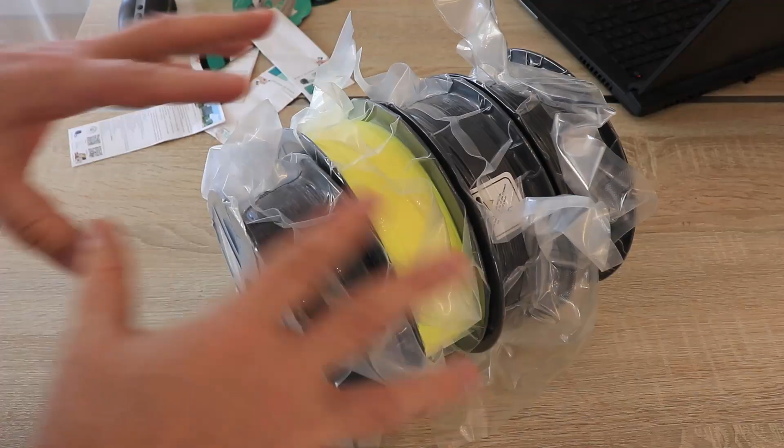The spools are in nice vacuum packaging, and here I have only one sticker with information about what is inside, and only on the other side. But for example, there is no brand on it. I don't understand, Sunlu, why they don't put their brand on the spool. So it has PLA META, an interesting printing temperature between 180 and 200 degrees Celsius, very low. PLA Plus in yellow color, printing temperature between 210 and 235 degrees Celsius. So this means I cannot use the same G-code for these filaments.

This is regular PLA, between 200 and 230 degrees Celsius recommended print temperature. And this is the carbon fiber version, 200 and 230 degrees Celsius recommended printing temperature. And unfortunately for the video, not too interesting, 3 of them are in black color and only 1 in yellow. This is vacuum packaging, but the bag is not resealable, so we cannot place it back and close it after printing. But anyway, PLA is not so sensitive to moisture compared to PETG or nylon filaments. And it's very nice that they have the warning for beginners to prevent tangling, to lock the end of the filament.

But Sunlu, for this I would recommend placing more holes on this spool. And the distance should be a little bit bigger, because I'm not sure if it is visible on camera too, but for example in this case this already broke in these 2 spots. I think with the carbon fiber version they should include here the warning about the hardened nozzle.

Usually carbon fiber versions feel like sandpaper to the touch, but this is a little bit smoother, not like those carbon fiber nylons I tested recently. But of course it is not as smooth as the other 3, but anyway definitely use a hardened nozzle with this carbon fiber filament. I'm starting with regular PLA, and the temperature tower will be from 230 to 200 degrees Celsius.

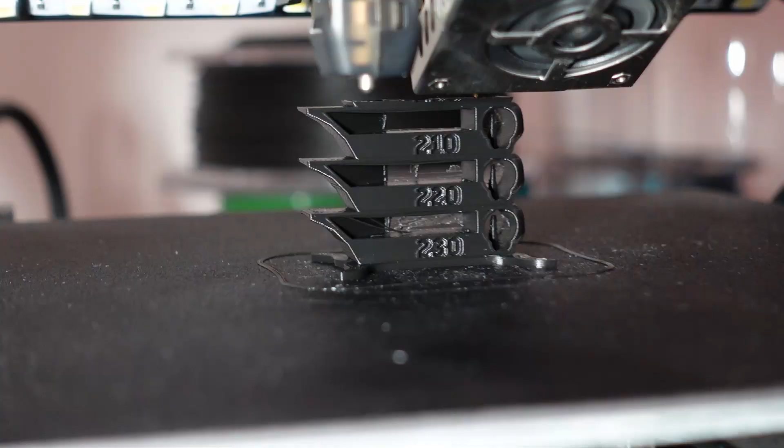The first layer looks good, but usually I don't even have problems with the Ender 3 S1 and PLA. Printing is okay, only I can see a little bit more stringing at 230 degrees Celsius, significantly reduced at 220, and completely disappeared at 210 degrees Celsius. But this means that the filament is not completely dry out of the box. The last element looks perfect.

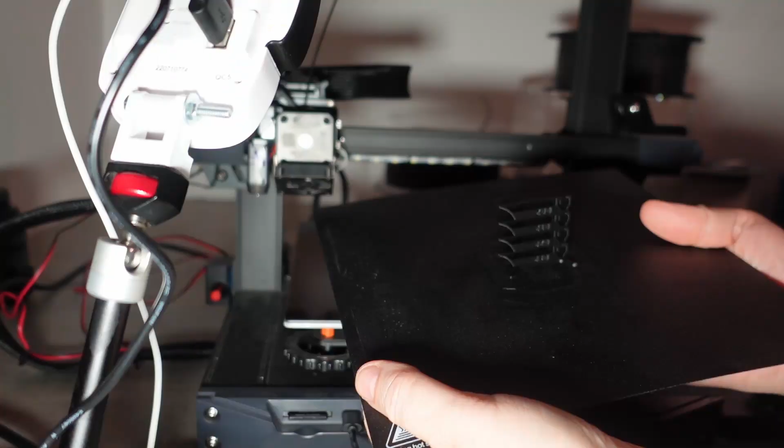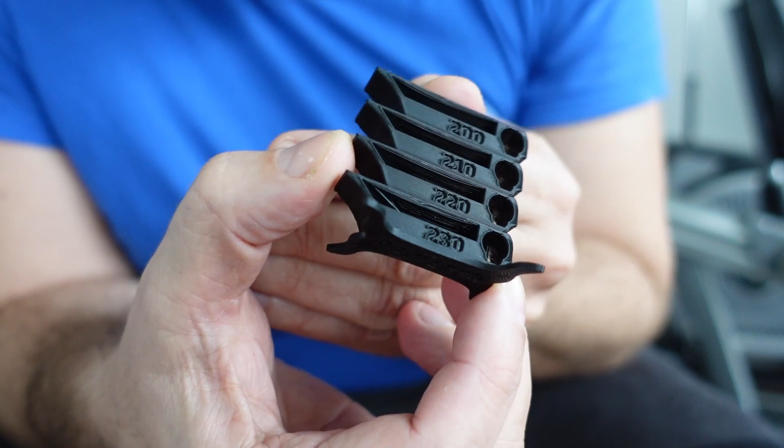And if there would be no stringing on 230 degrees Celsius, and minimally on 220, this could be a perfect temperature tower because it has great bridging, perfect overhangs, and also all other surfaces are great. And this is the back side.

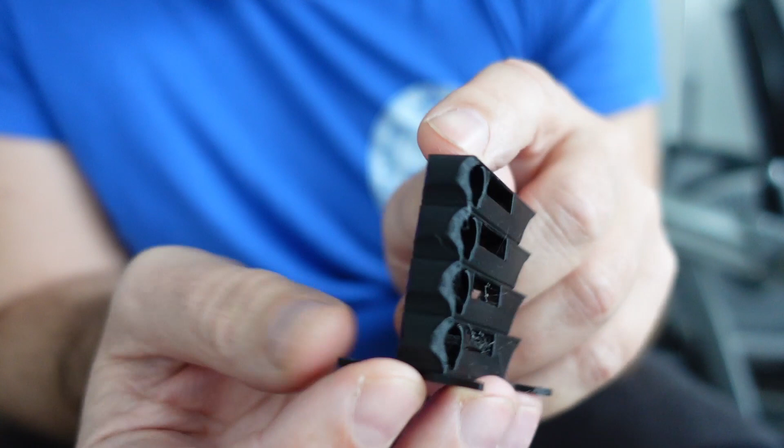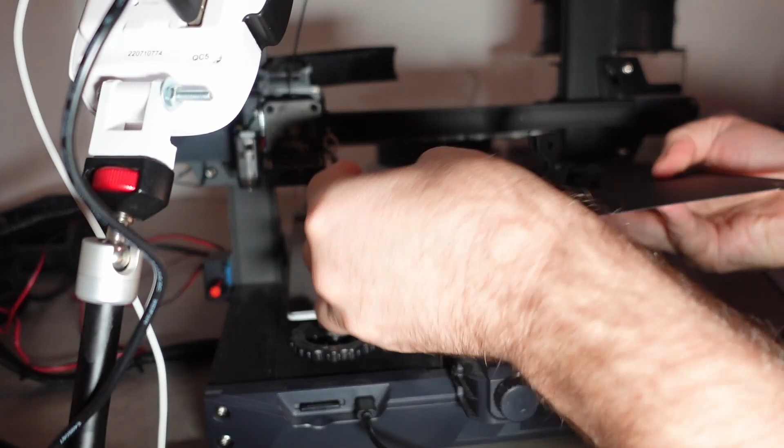All test subjects will be printed at once. After 1 hour and 25 minutes everything is okay, and I hope it will stay like that because this will be an overnight printing. Good morning, and the printing was finished without problems. I can see that stringing was present even at this temperature, but very minimally.

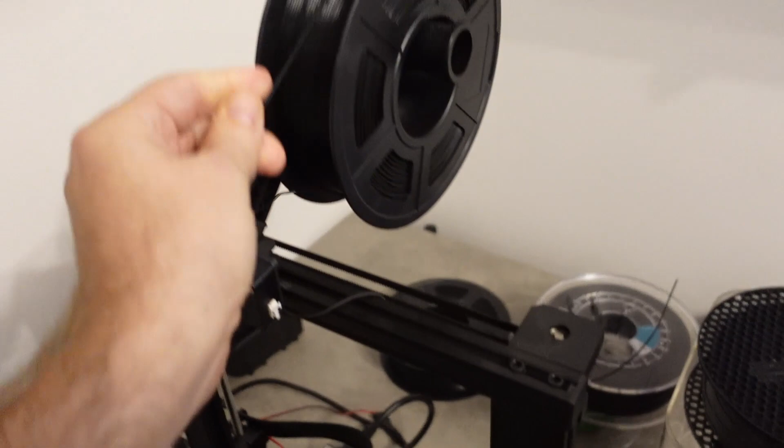And now moving to PLA META because it is also in black color, and the temperature tower will be from 200 down to 180 degrees Celsius. I usually never print on such low temperatures. The first layer is okay. This is the bridging on the second element. And it's okay, there is no stringing at all and the bridging is perfect.

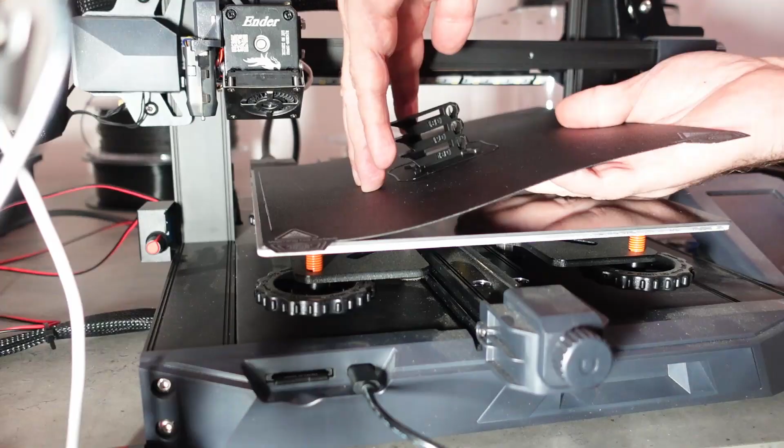I was worrying about printing on 180 degrees Celsius, but this looks okay. I cannot see any kind of error on this temperature tower. Perfect bridging, overhangs, great surfaces, absolutely no stringing on any temperature.

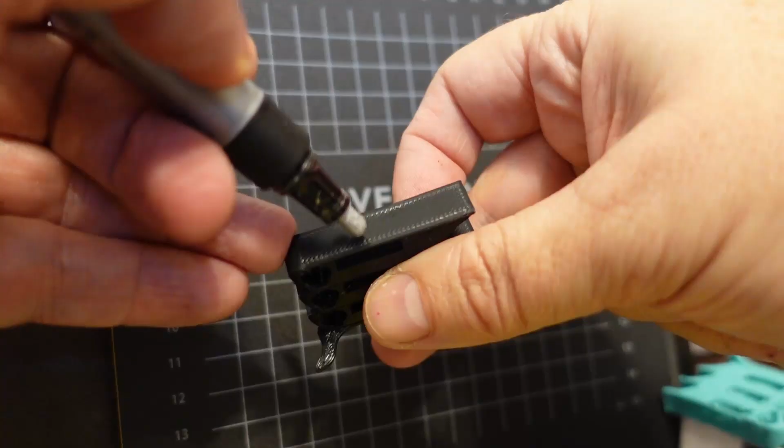And now I print all test objects on 190 degrees Celsius, which is in the middle of the recommended printing range. For PLA META, we use the silver marker. Again, all test objects at once on 190 degrees Celsius, and these are great first two layers. Last two elements for the layer adhesion test.

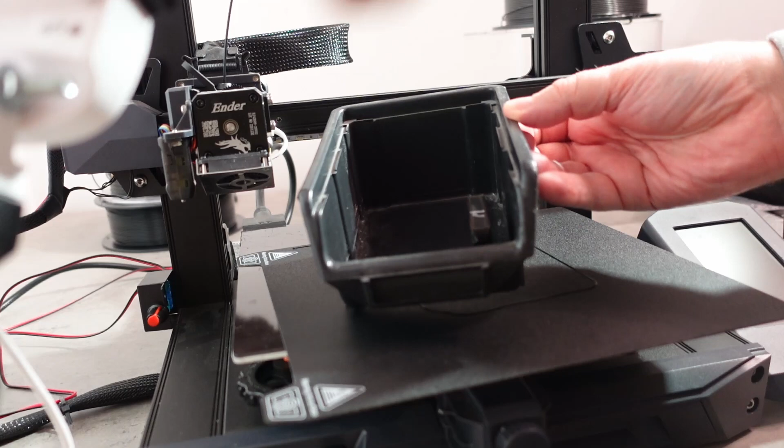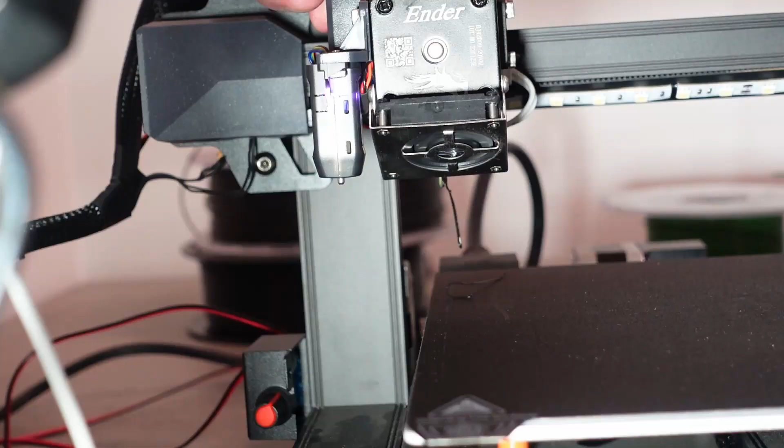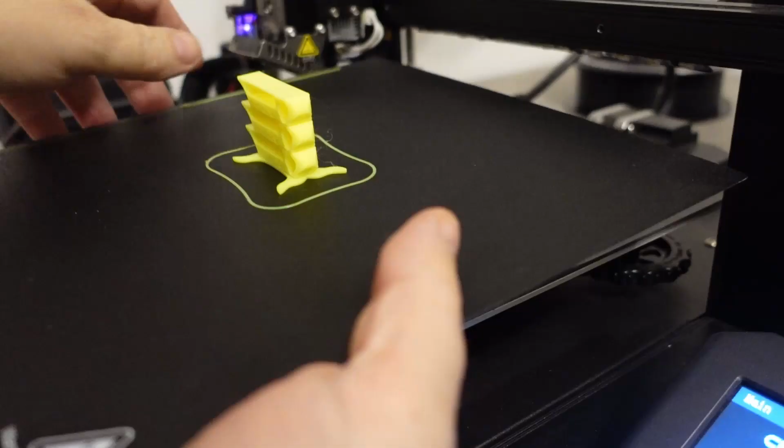And now PLA Plus, and this yellow color will be a real refreshment for this video, and the temperature tower will be from 230 down to 210 degrees Celsius. And like with other PLA filaments, there is no problem with the first layer or the bed adhesion. This will be another very clean printing. Just a few strings on maximal printing temperature, but otherwise this is another perfect temperature tower.

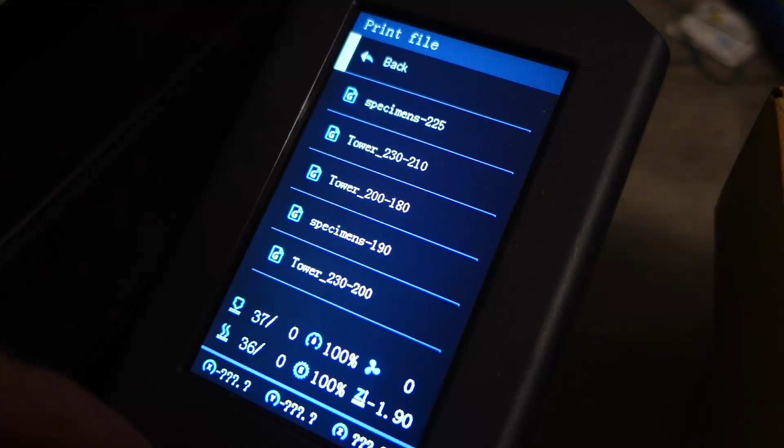And I don't have to mark this one because this is the only one which is not in the black color. And I print all test objects on 225 degrees Celsius, which is approximately in the middle of the recommended printing temperature range. Well, this is another perfect first layer. I can see a few strings here and there, but I'm not worried about it. And this will also be printed during the night without supervision. Overnight printing successful, and I can see just a few strings, otherwise it is great printing.

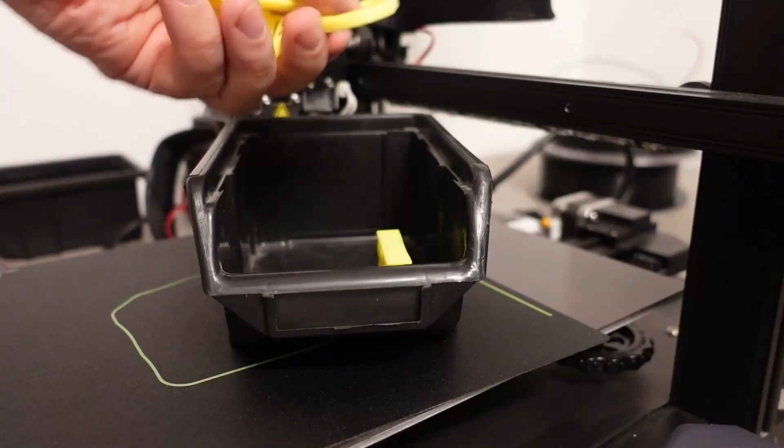And it's time to print PLA carbon fiber, but there is a small problem. I checked Sunlu's website in detail. I couldn't find any information that it requires a hardened nozzle, but I'm sure that I shouldn't print with the brass nozzle, and I don't have a hardened nozzle on the Ender 3 S1. The only printer which I have with a hardened nozzle is the Prusa behind me, so this will be the only filament in this test which will be printed on a different printer. But I have no choice, I don't want to risk printing it on the brass nozzle.

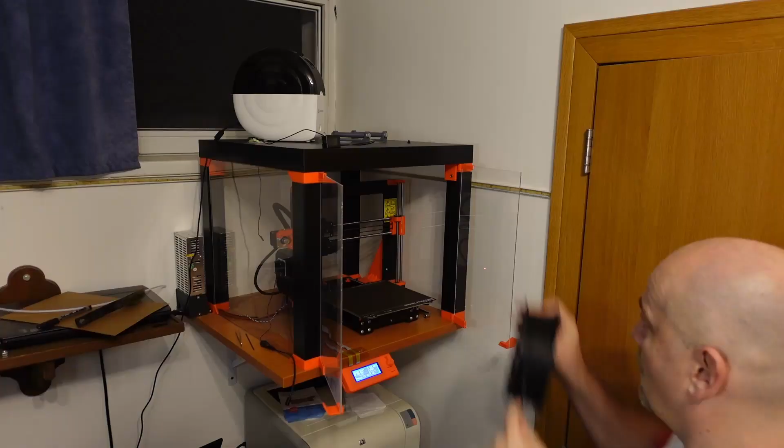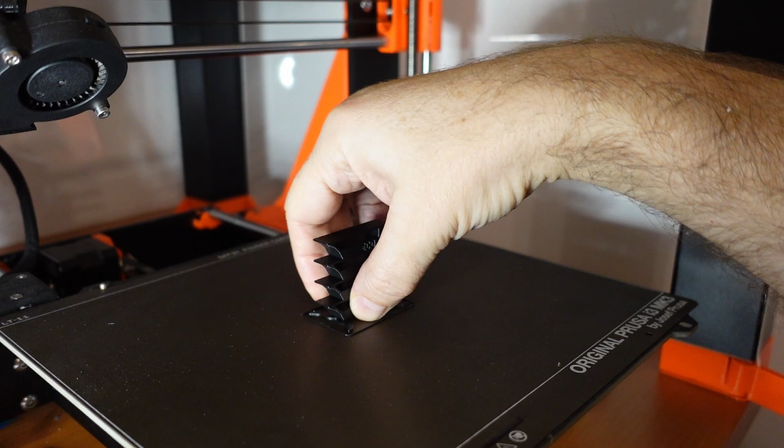Currently the enclosure is mounted on this printer, but it will be open because it is not good to print PLA inside the enclosure. It's a little bit hard to see, but the first layer goes down perfectly. The printing looks great so far. Printing is finished, quick bed adhesion check. Okay. The skirt came off very easily, so probably the object will too when the bed cools down. Bed cooled down? Oh, perfect.

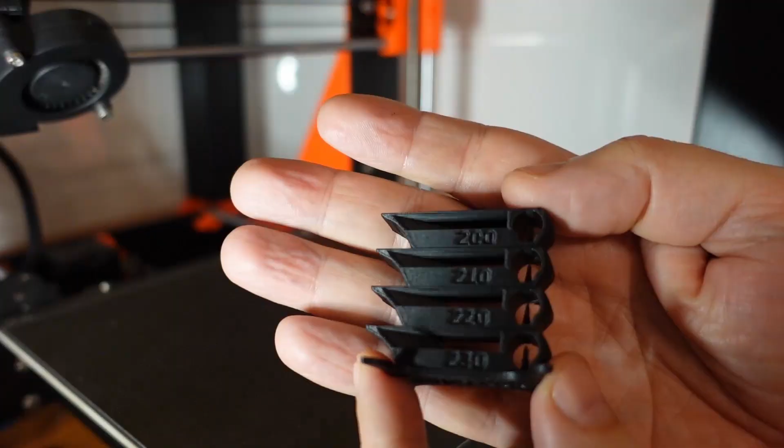I will compare all temperature towers later, but this is perfect. I think this one is the best. And for the feeling, it is a little bit like sandpaper, so I can feel those carbon fibers. Now I have to decide at which temperature I want to print the test objects.

Now, the recommended printing temperature is between 200 and 230 degrees Celsius, same as with the regular PLA. But here we have to use the hardened nozzle, though they don't mention it on the website, and the hardened nozzle has weaker thermal conductivity, so we have to raise the temperature a little, by 5 or sometimes even 10 degrees Celsius. So I will print all test objects on 220 degrees Celsius, not in the middle on 215.

Start of the printing is without problems. This is now the third layer. And last two objects for the layer adhesion test. And I think I have to reprint this one for the bending test.

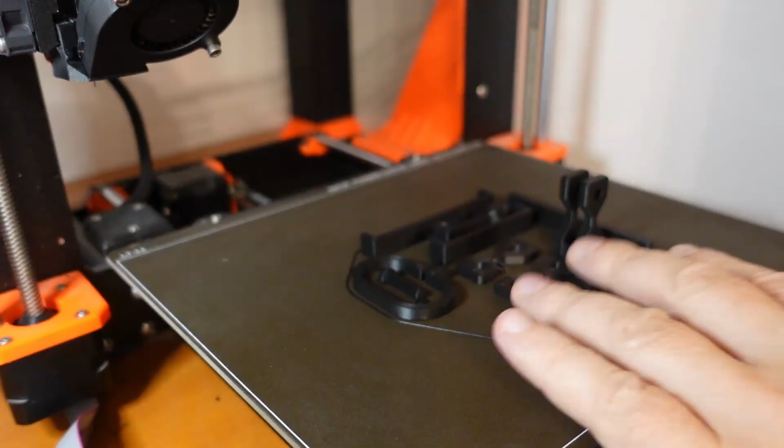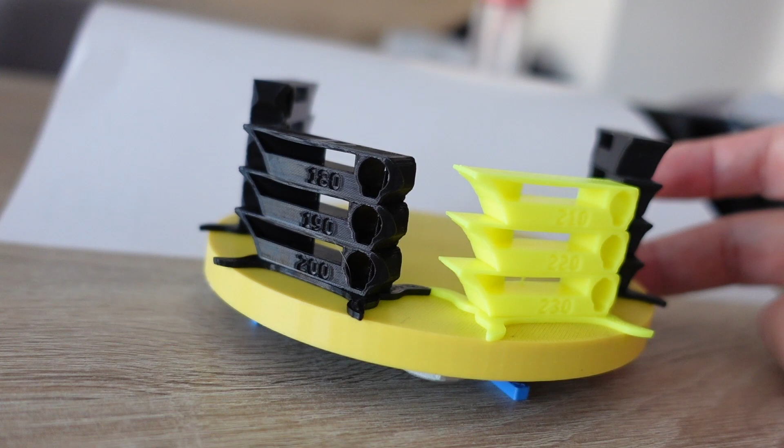And here they are one more time, side by side. The first one is the regular PLA, then PLA META. The yellow is PLA Plus, and the last one is the carbon fiber version. And the same order here. And now everything is ready for the mechanical testing.

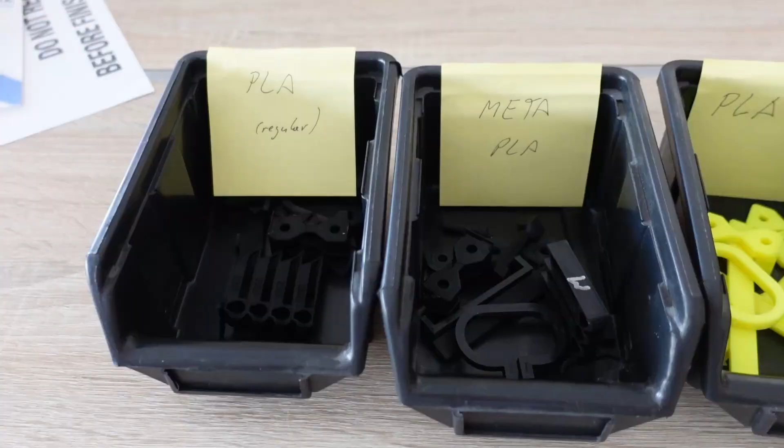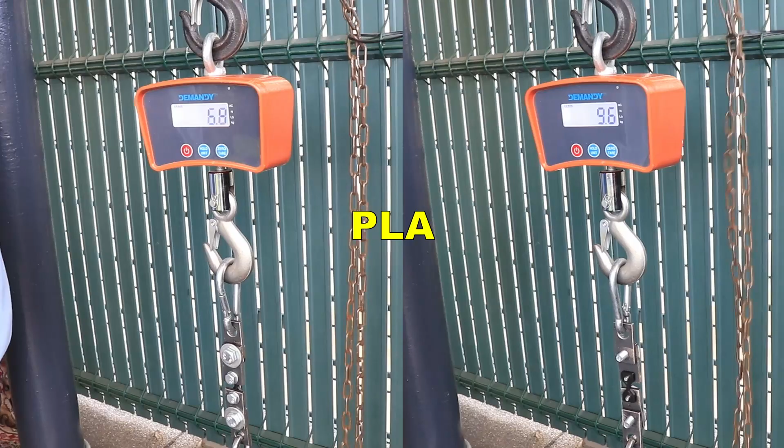A tensile pulling test. These test objects are printed in horizontal position, and I am starting with regular PLA. PLA META. PLA Plus. Carbon PLA.

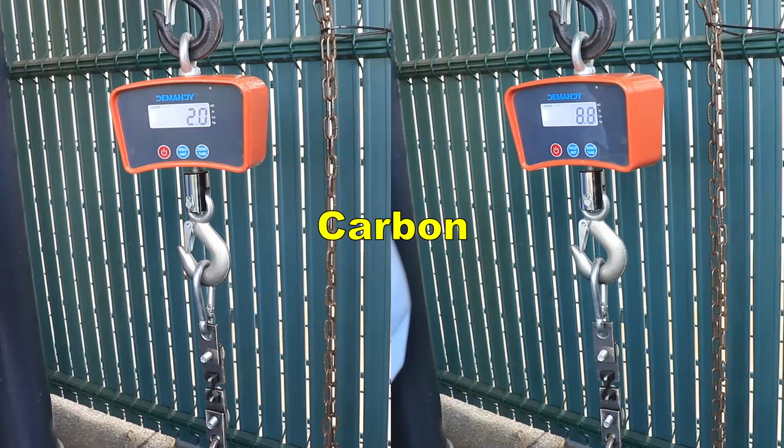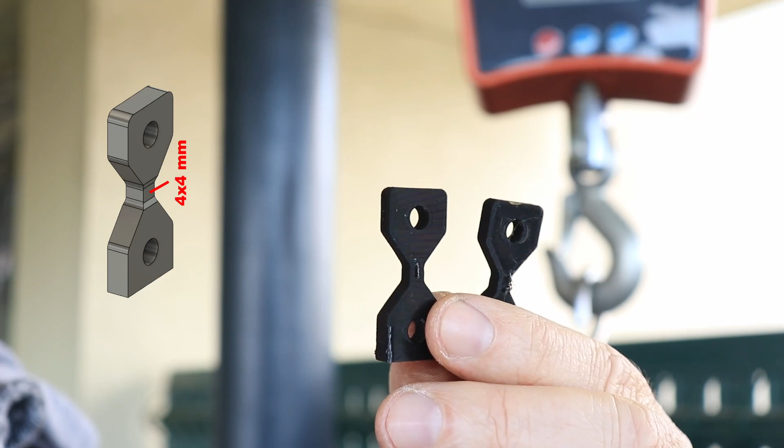And this is how they broke, and when I see a break like this, not on the small cross-section area, this is a typical sign of weaker layer adhesion, but this was also weak in this tensile test, so not too promising for the carbon version. And now the layer adhesion test with these vertically printed test objects. Smallest cross-section area is 4 by 4 millimeters.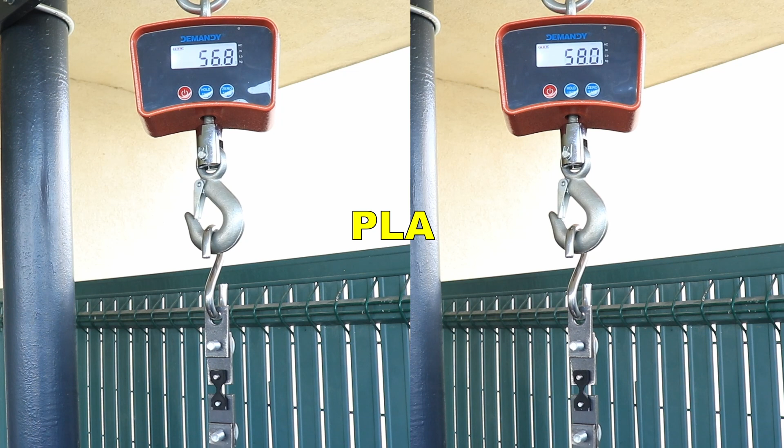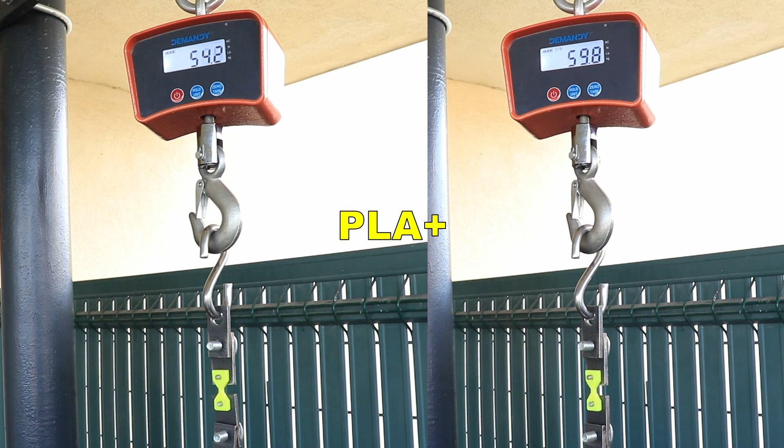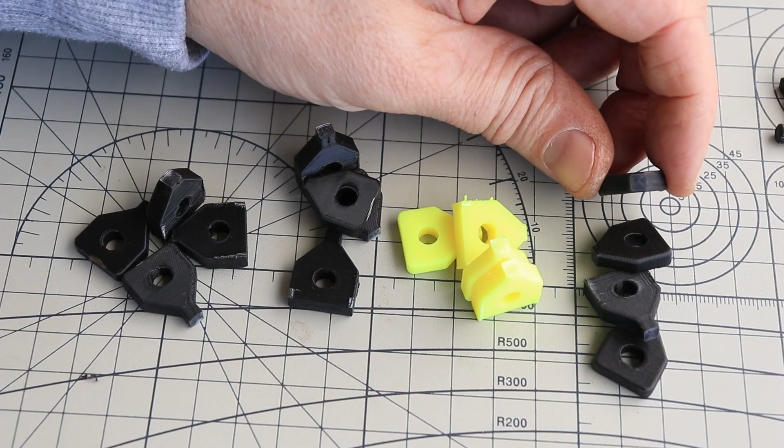PLA META is the next one. PLA Plus. And the carbon PLA. Are these carbon fibers only for marketing purposes? Well, you saw the numbers, so these three PLAs are very strong, but the carbon version is very weak. But in all four cases, the cross-section areas are very similar.

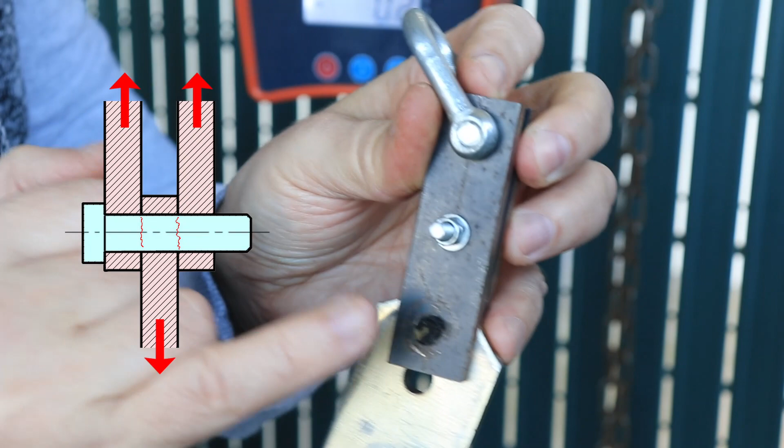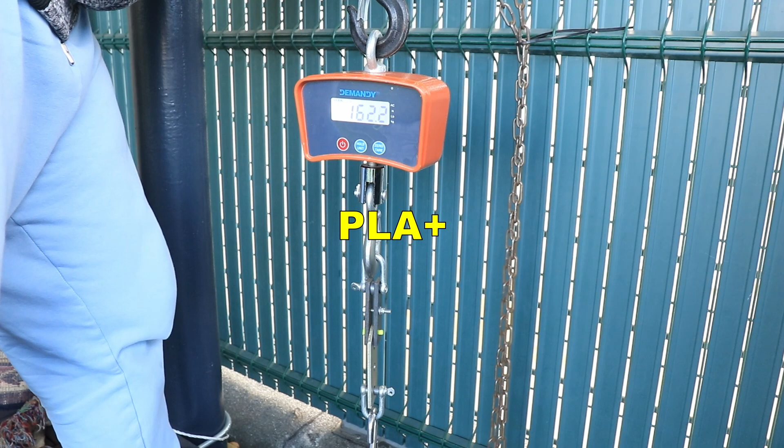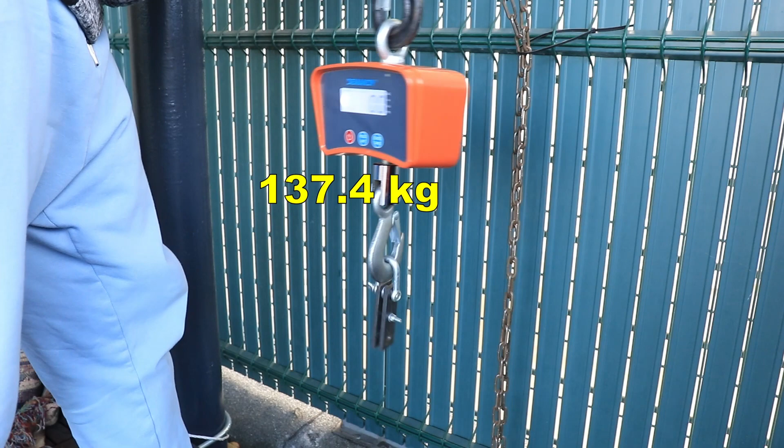And now two-sided shear stress, and I'm starting with the regular PLA. And now PLA META. PLA Plus. And the carbon version. They all sheared correctly on those two cross-section areas, only sometimes I cannot find all three pieces, especially if they are in black color.

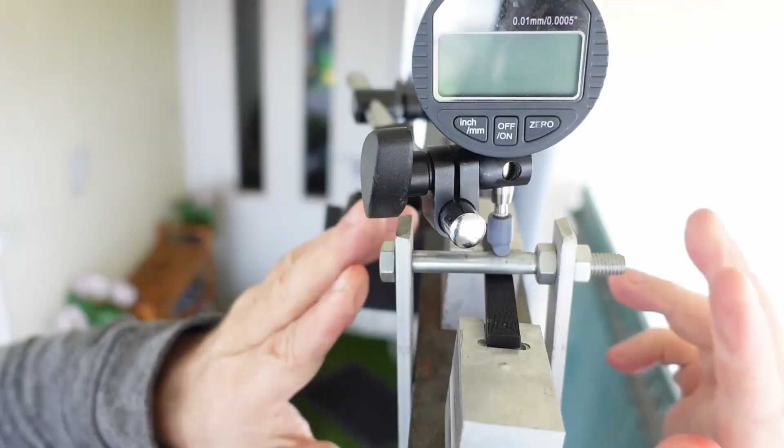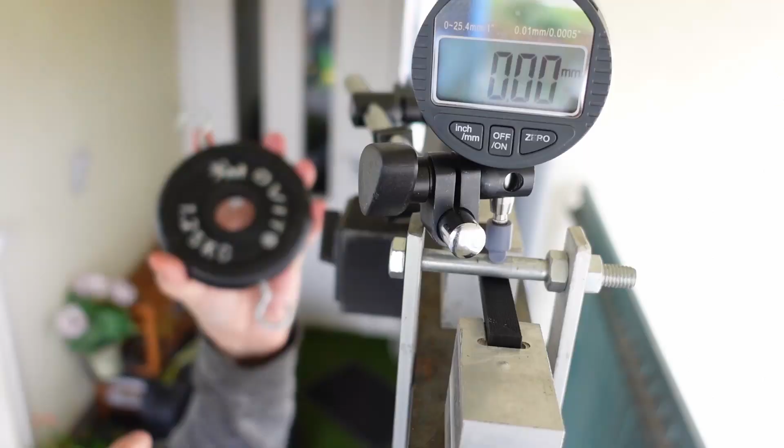And now 3-point bending test. The distance between supports is 50 millimeters, and I will measure the deformation with this dial indicator, and I will place first 1.25, 2.5, 5 and 10 kilograms, and I will record the deformation after 1, 30 and 60 seconds. Only in video I will show you the deformation after 30 seconds.

Here you can see side by side the PLA and the META PLA filaments. And now this is a 5 kilogram load on them, and this is the 10 kilogram load. And then moving to PLA Plus and the carbon PLA, and this is 2.5, 5 and 10 kilogram load after 30 seconds. Looks like this is not too big load for this object, because I cannot see any permanent deformation on them.

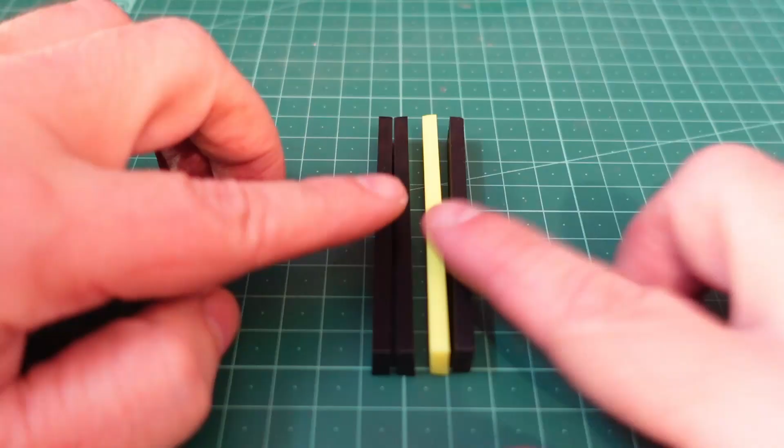And now my torque or twist test. I have this test object 6 mm in diameter, and this side goes into this torque meter and the other side goes into the vise, and I want to record the load at 90-degree rotation and the maximal load.

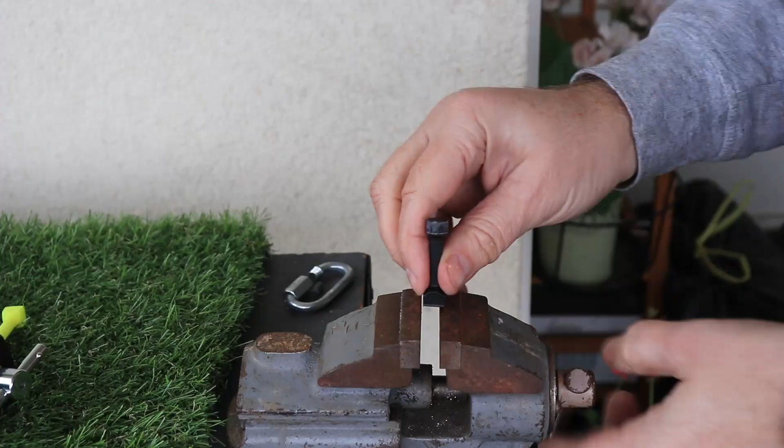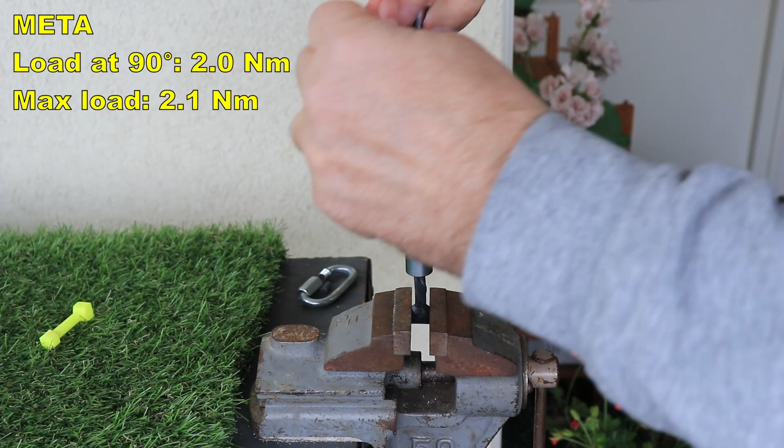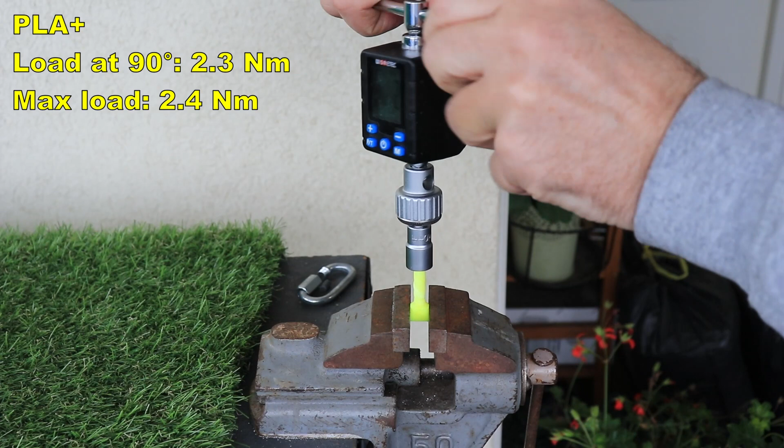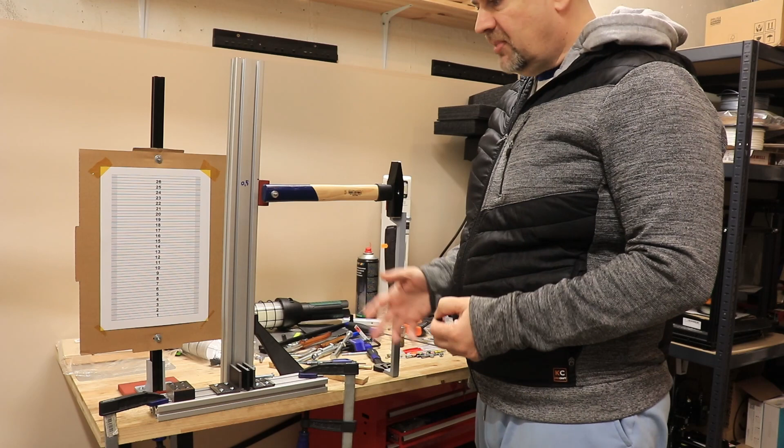With this IZOD impact tester, I have this half-kilogram hammer, and there will be the test object, and it will swing to the other side and break the test objects. It depends how much energy it will use for the breaking, it will swing to the other side, and if the material is tough, it will lose more energy and swing to the lower position. And with this I can measure how tough or brittle is this object.

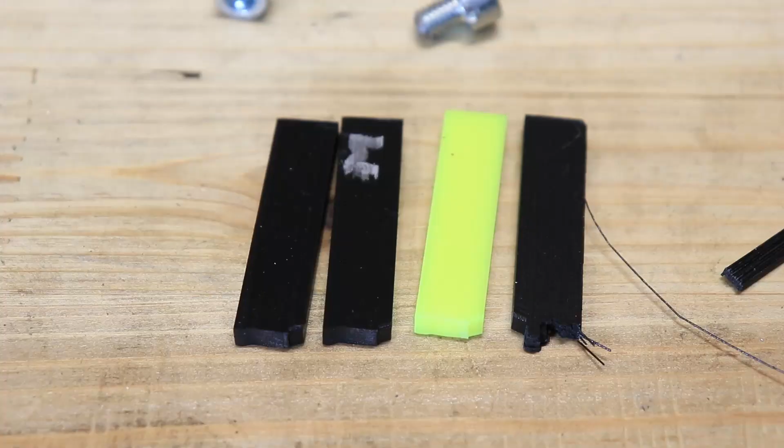Regular PLA, 0 position, PLA META, PLA Plus, carbon PLA. These three broke very similarly, they are very brittle materials, but the carbon fiber version didn't break in the first hit, only when the hammer swung back, only then it broke off the remaining part.

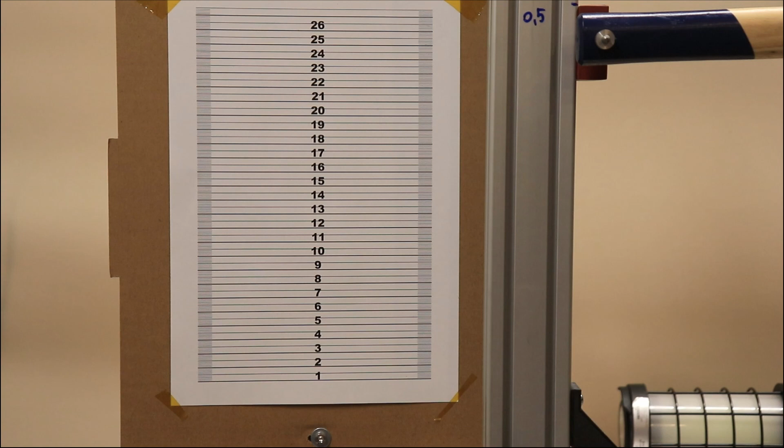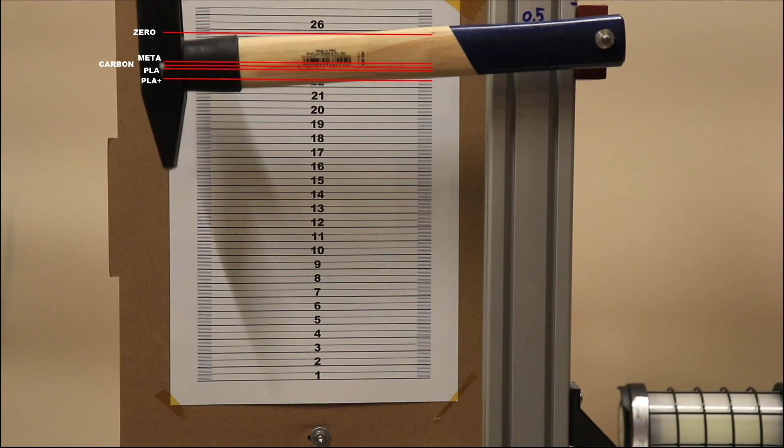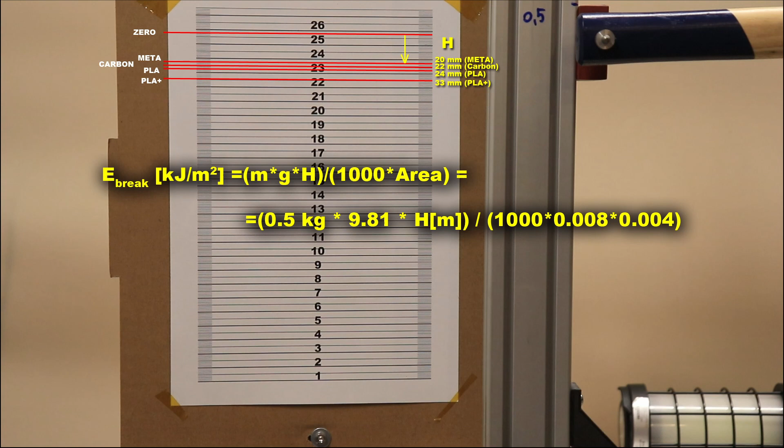But now let's analyze the footage. The scale, and this is the 0 position of the hammer, and this is after breaking the PLA test object, and this is after breaking the META PLA, PLA Plus, and carbon version. And if I measure everything from the 0 position, I will get the height for calculating the potential energy, and I will use this equation. Half-kilogram hammer, g is the acceleration, and the h must be in meters, and I will get the energy in kilojoules per square meter. The graph I will show you in the results part.

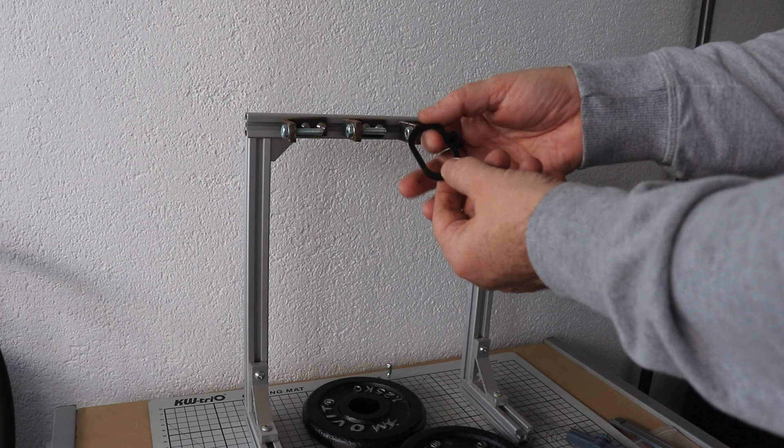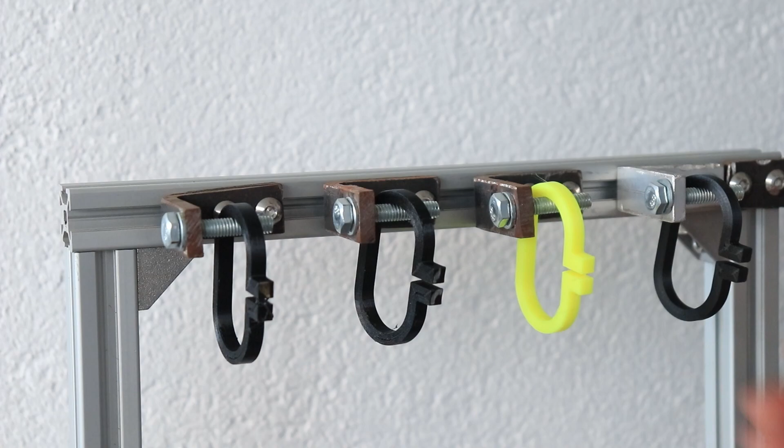The creep test will give us information about the deformation under the constant load. I have these test objects, and this is the reference surface, and I will place this 1.25 kilogram load on these test objects, and I will measure this distance every day. This is regular PLA, PLA META, PLA Plus, and carbon fiber PLA. And now placing the load.

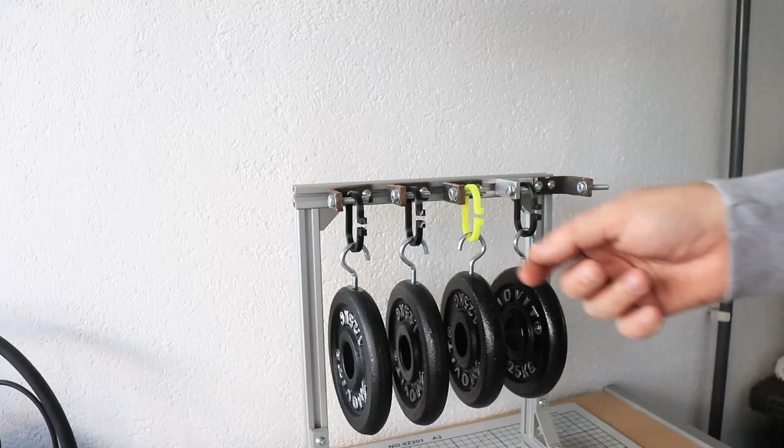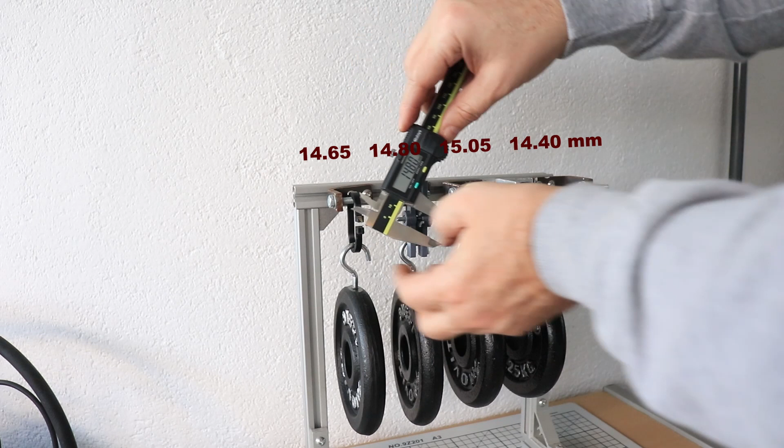And now measuring the reference surfaces, but I'm locking the position for more accurate measuring. 1465, 1480, 1505, 1440. And I will measure them every day, but off camera, only I will create a picture each day. This is day 0. Day 1 after 24 hours, day 2, day 3, day 4, and the last day 5.

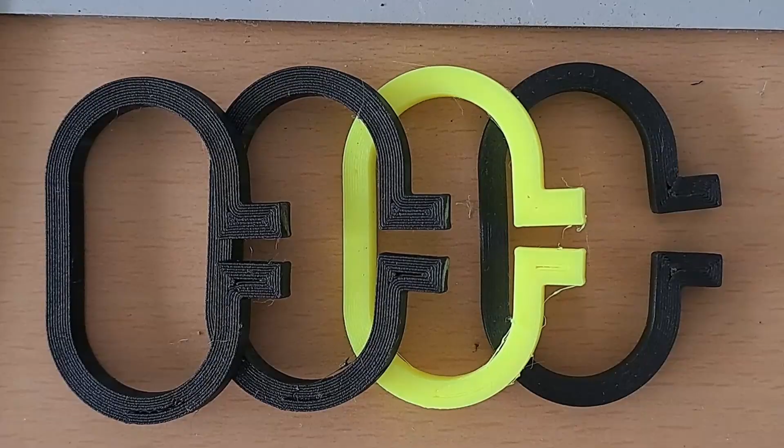This is the last day, and now let's remove the load. And this is their deformation approximately 10 minutes after I removed the load. So as you can see, the biggest permanent deformation we can see on the carbon fiber version, and the smallest I think on the PLA Plus. And I'm not placing them in the oven during this creep test because last time when I tested PLA it fell down, so I don't want to damage the oven, but I will do my regular temperature test.

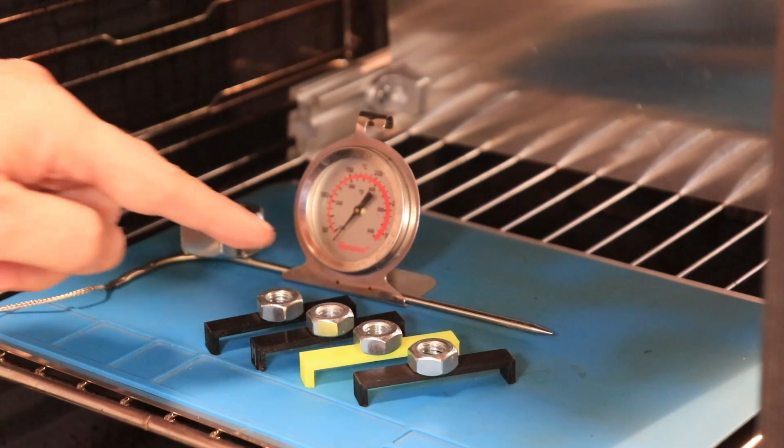I have these test objects with an M10 nut as a small load, and I will follow the temperature of the first deformation with this cooking thermometer. This is just a backup solution. And this is the time lapse of approximately 5 minutes. Don't be confused, the backup thermometer has a small delay, more accurate is the cooking thermometer.

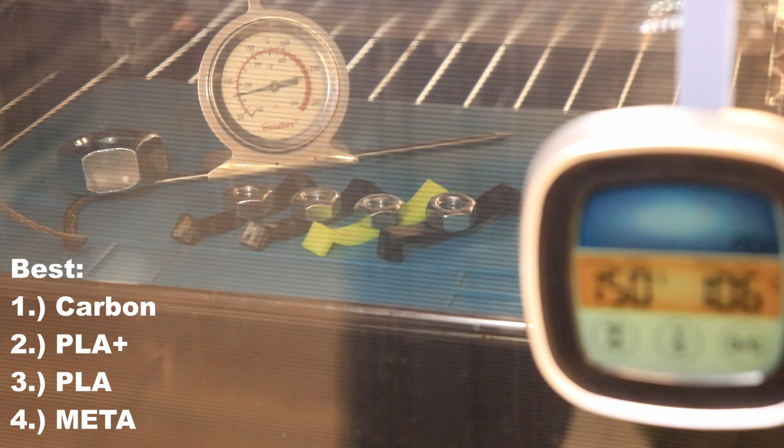And as expected, all 4 PLA filaments started with deformation at 50 degrees Celsius. Only I noticed that the further deformations had a different speed. I will stop the experiment now at 100 degrees Celsius because I want to see the condition of the carbon filament.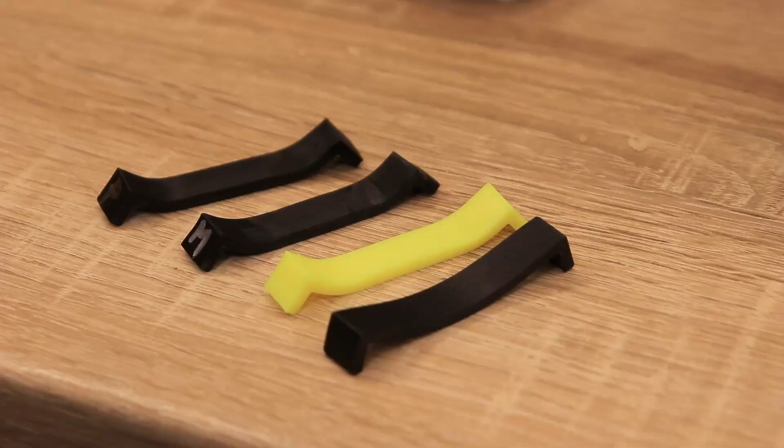For the feeling, these 3 are equal, and this looks quite hard, and I can see less deformation on the carbon PLA. Well, they cool down now a little bit, so I can touch them, and as you can see for the feeling, these two are very equal, and also the PLA plus. And for the feeling, I cannot deform this carbon PLA anymore. So in this test, the carbon PLA is the best.

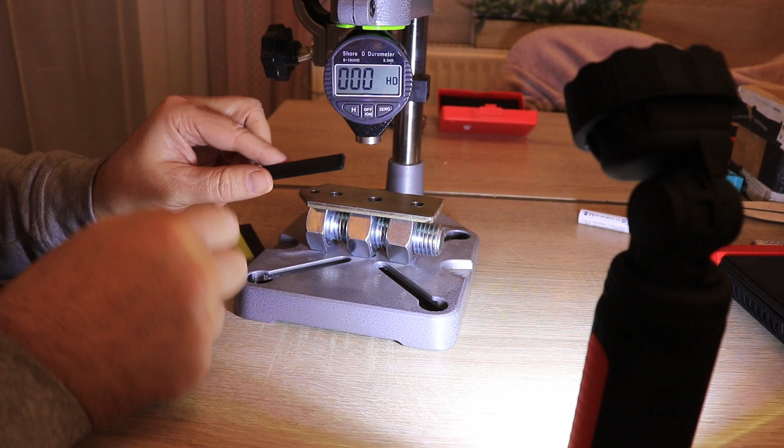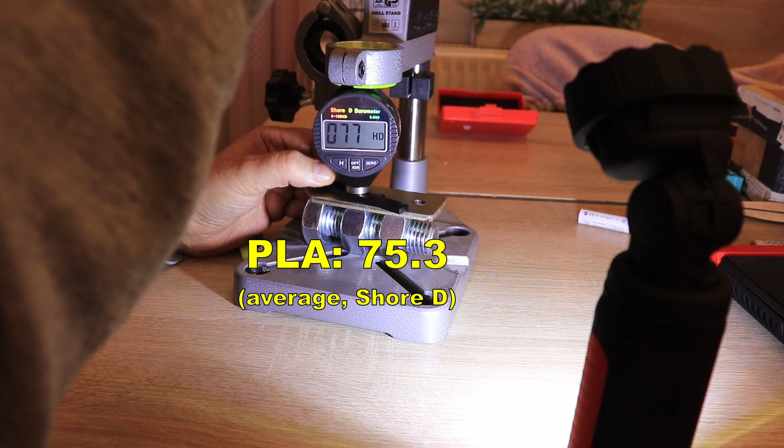I almost forgot, and now let's measure the hardness with this Shore D durometer. And I'm measuring in the direction perpendicular to the layers. And this is the regular PLA: 74.5, 75, 76.5. META: 79, 79.5. PLA plus: 78.5, 70.5, 79.5. And now the carbon PLA: 70, 71,

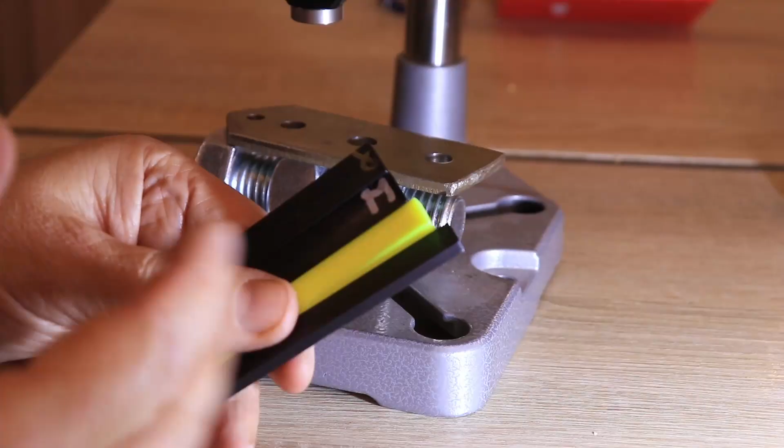73.5. So looks like yes, the META is a little bit harder material compared to the others, but I'm not sure what it means. With metals it means it is more wear resistant. I'm not sure if it is the case with the plastic too.

And now let's analyze the data. I'm starting with the creep test. So these numbers are directly measured values between two reference surfaces. But what we need is the difference between 2 days. So that's why I prepared this table, and this can be visible on this graph. And here we can see basically these are very similar. After the third day, these are very minimal deformations. Only the carbon fiber PLA had a little bit more creeping even on the 5th day.

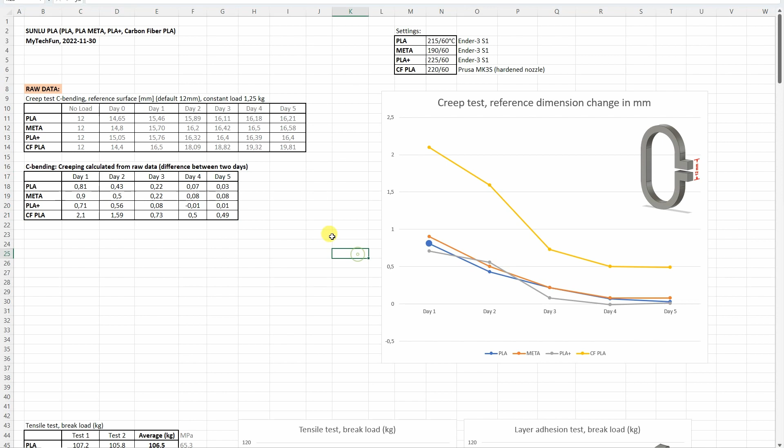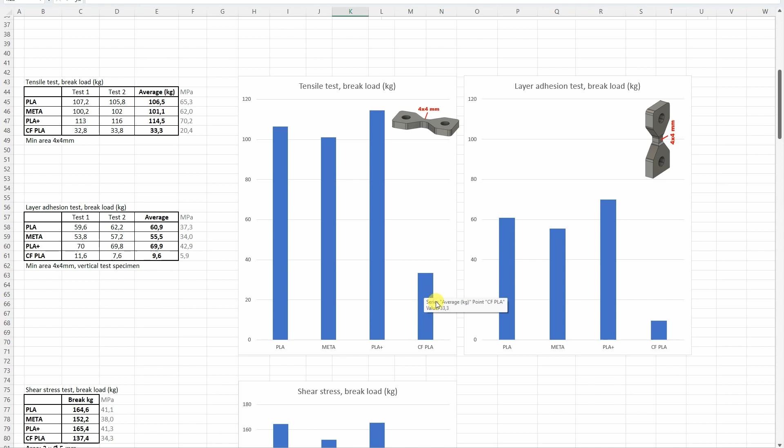Tensile and layer adhesion test. So these three filaments are very similar, and actually they perform very good even on the layer adhesion test. Only the carbon fiber PLA was very weak in the layer adhesion test, but also in this tensile or pulling test. On this two-sided shear stress, as you can see, all four filaments perform very similarly in this test.

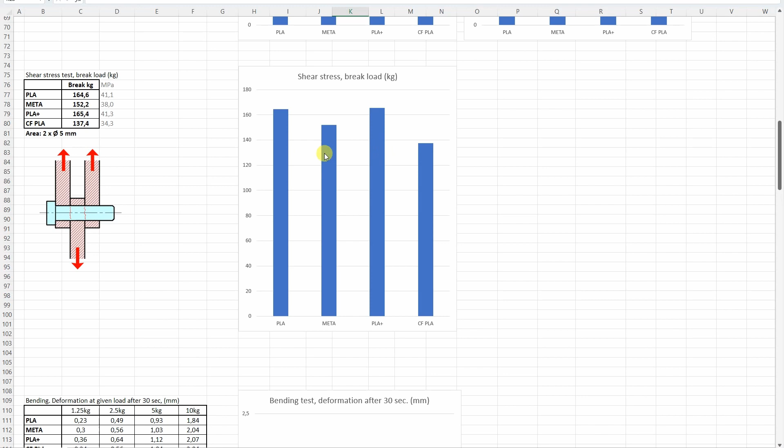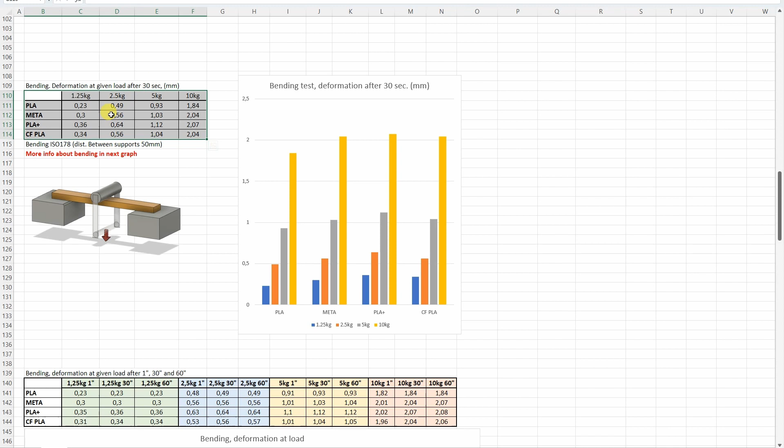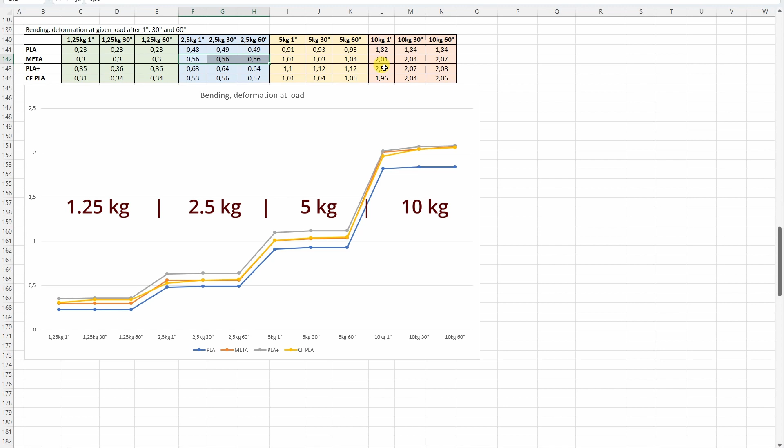And now the bending test, I think this is the most valuable information. Here we can see only the deformations after 30 seconds, and this is what you can see in the video too. But I believe that more useful information is this. So as you can see, I record the deformation after 1, 30 and 60 seconds. If this is something horizontal, then it is good. If we have something under an angle, like I think here, that means it creeps and the deformation is present even after 1 minute. Smaller values are of course better, so in this test the regular PLA performed the best.

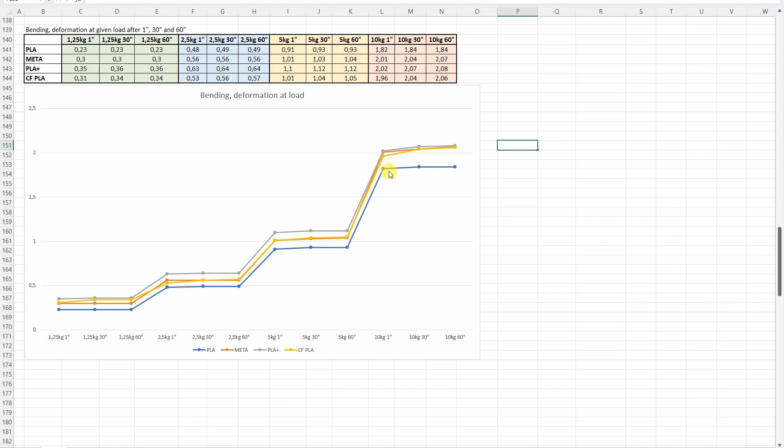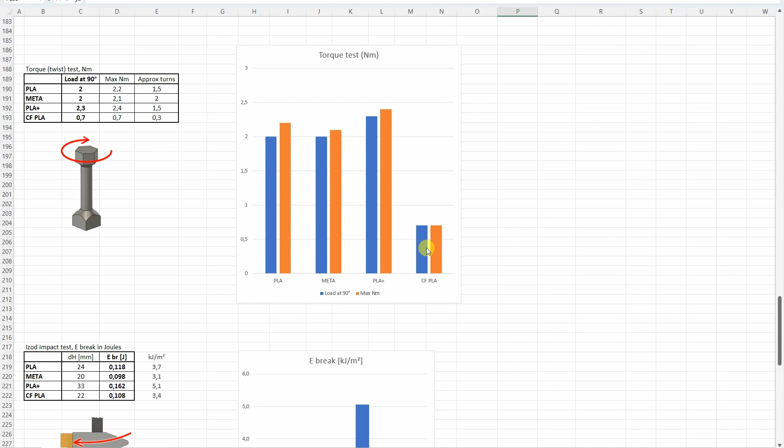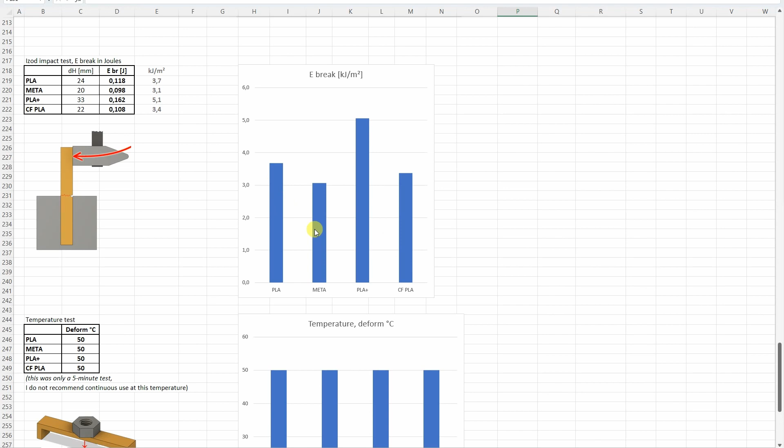The torque or twist test, again, these three filaments are very similar. Maybe the PLA plus was a little bit stronger. And thanks to that very weak layer adhesion, the carbon fiber PLA was very weak in this test too. The IZOD impact test, here I measured the breaking energy, and interestingly, here the PLA plus was the best, and then the other three filaments were very similar. The temperature tests were basically as with PLA, so they deform at approximately 50 degrees Celsius.

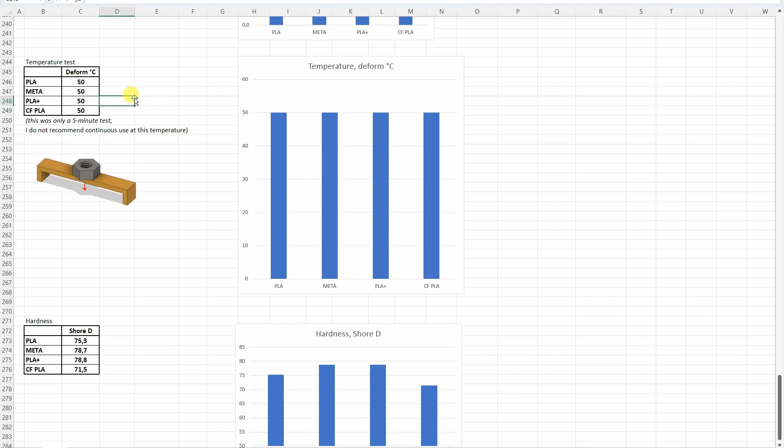And since they list the hardness in the specifications, I measured it. So yes, the META and PLA plus basically have a little bit bigger hardness on the Shore D scale, but I'm not sure how important this is. Maybe they are a little bit more wear resistant filaments.

And now the conclusions. Well, you saw the numbers about the first three filaments, the PLA, META and PLA plus. They're very similar materials. It is very nice that META can be printed at lower temperatures. This may be important for somebody with those cheaper printers, which are not able to print at higher temperatures. But still from these three, I think the PLA plus is my favorite, especially because of that impact test. So it's a tougher material. About this carbon PLA, if we look only at the mechanical properties, it is a very bad material.

But recently I got some carbon fiber ASA for testing, and the manufacturer clearly informed me about its biggest advantage. It is in electricity. It has lower resistance, and it will not build up electric charge or something like that. So maybe that's the case here, but on Sunlu's website there is no information about this. So I think Sunlu should work a little bit on that background information for the users. And also I think they should add at least a logo on their spools, and add a few more holes for locking the end of the filament on the spool.